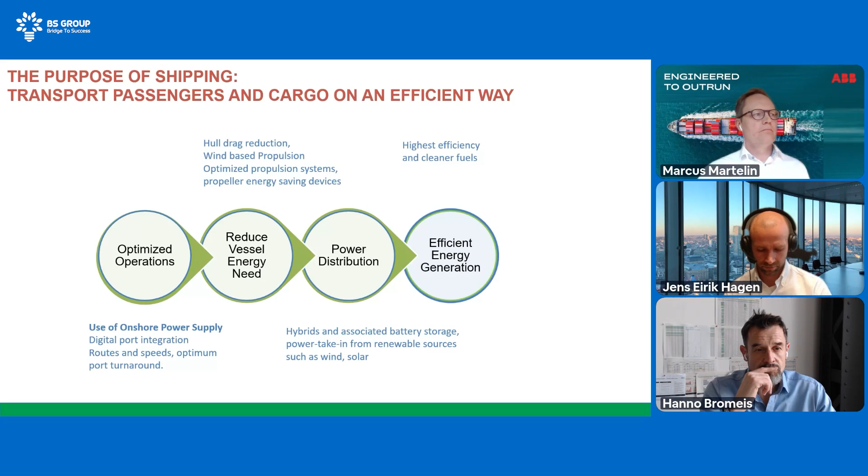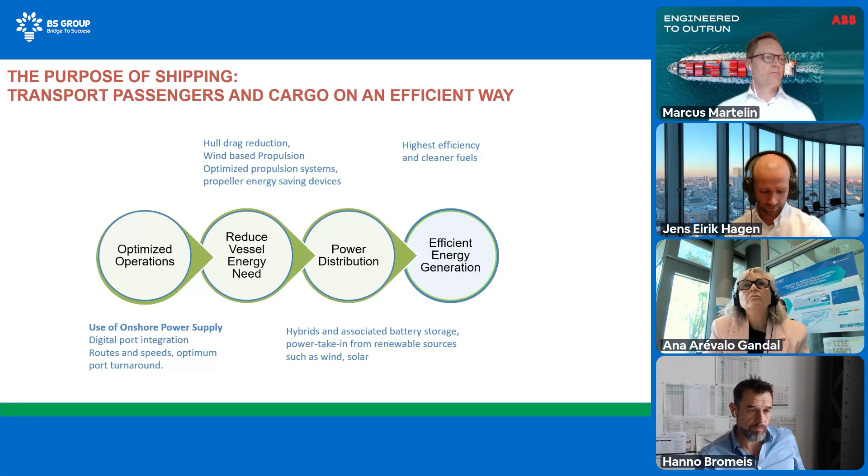And again, personally, since I've been involved for 25 years in energy saving, I see the onshore power supply as part of the overall picture. So you have the shipping industry, and you need to optimize operations, reduce vessel energy need, improve the power distribution of the vessel, and generate the energy efficiently. So there are quite a few actions. And in this frame, one of the actions is the use of onshore power supply. And we see how this is going to help.

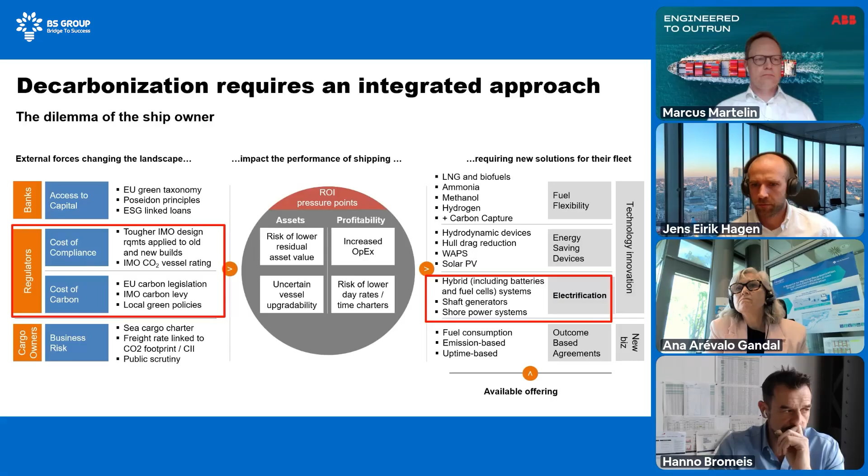Again, I'm trying to present the overall approach. You have the shipping industry at the middle. You have the forces which are impacting it, including the regulations and the way to improve the environment. You have solutions. Among the solutions, let us not forget we have the fuel flexibility. We have the electrification, and in the electrification, there are the shore power systems involved. But it is the overall picture that we cannot forget. Shore power systems are a part of the overall puzzle.

Are there any maritime legislative actions? Yes. Are they covering other countries than Europe? Yes. So there are already requirements in the US, in China, in Norway, and in quite a few other countries, including Singapore, UK, Australia, New Zealand, Canada, South Korea. Some of them are non-mandatory rules, but still the subject is under discussion in a global way. And from our side, we are focusing our attention on Europe, so we have three European ports today.

I'm mentioning the environmental legislation from the EU Fit for 55 package, including the Alternative Fuels Infrastructure Regulation, which covers the supply in ports, FuelEU Maritime and the EU Emission Trading System (ETS), covering primarily the demand, and the Energy Taxation Directive. All of them dictate that by 2030, selected ports in Europe on the Trans-European Transport Network need to be ready for onshore power, covering container ships and passenger vessels, ferries above 5,000 gross tonnage.

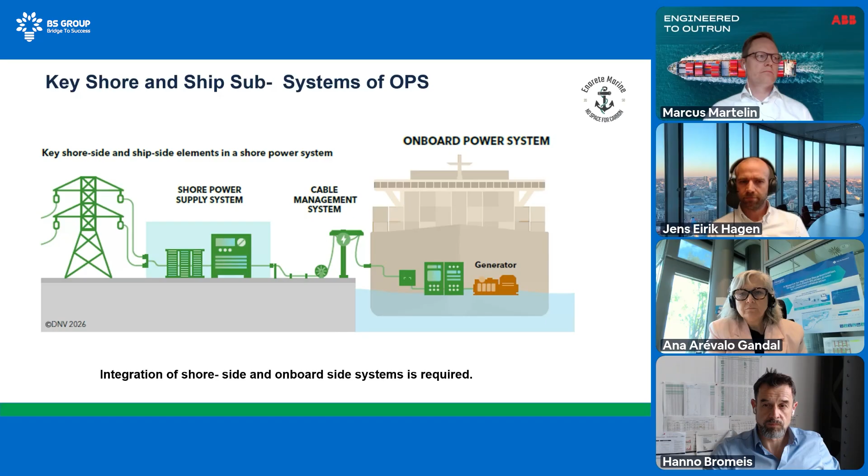And again, I need to say the importance of the integration. There are systems required on the ground at the port. There are systems required on board of the vessel, and these need to be able to work together. And this integration, the engineering efforts to have the correct interfacing, is of paramount importance.

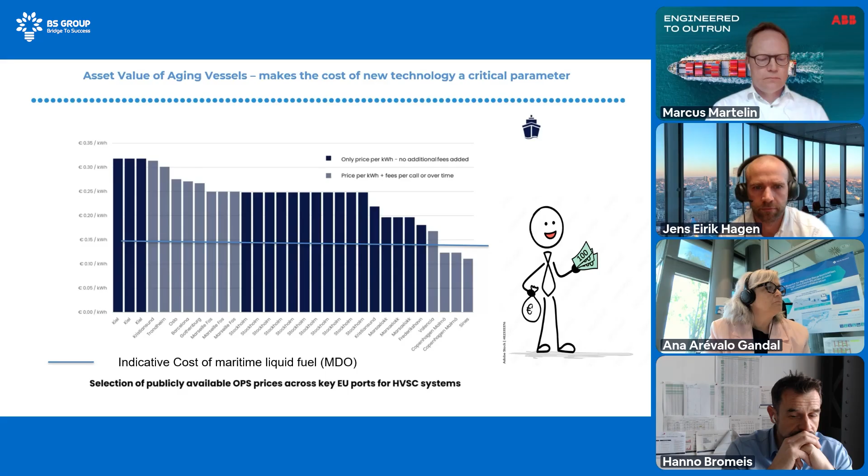So if we see from this point of view, we can say that the electricity is costing money, but there is a but, and this is explained in the following slide, where actually you see that for a period of 15 years, and taking into account the penalties introduced by EU ETS, the penalty costs which are added to the cost of the fuel, at the end the improvement for the ship owner is quite significant. So for the ship owner, it's not only that it is good for the environment, but it's also having the economics working positively.

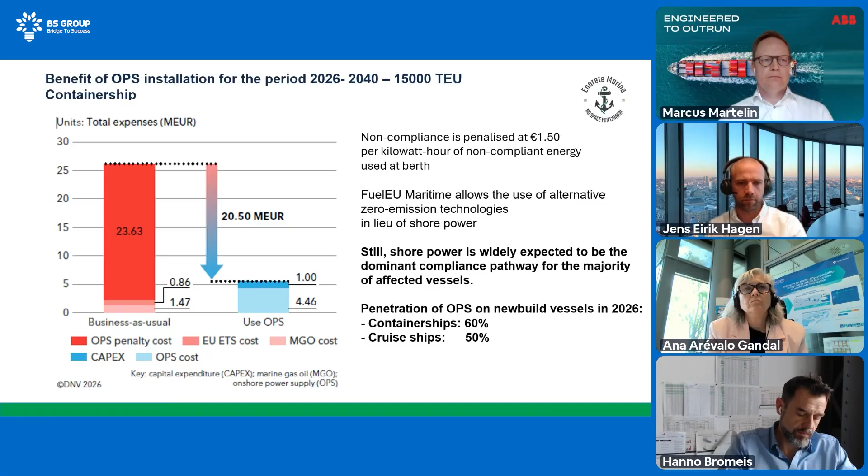It's not a surprise if we see that in 2026, from the new built vessels, 60% of the container ships and 50% of the cruise ships, these are approximate numbers, are already equipped with the systems on board of the vessel to allow shore power connection.

So for the ports it really is a big challenge to provide the power required, which means the regulatory readiness, which is required in parallel to the infrastructure and grid readiness, commercial aspects, the funding readiness. Of course, the harbors, each of them individually, will analyze the demand, types of vessels visiting, power required for individual vessels, and then make the plans for the deployment of the systems on the port and the operational integration.

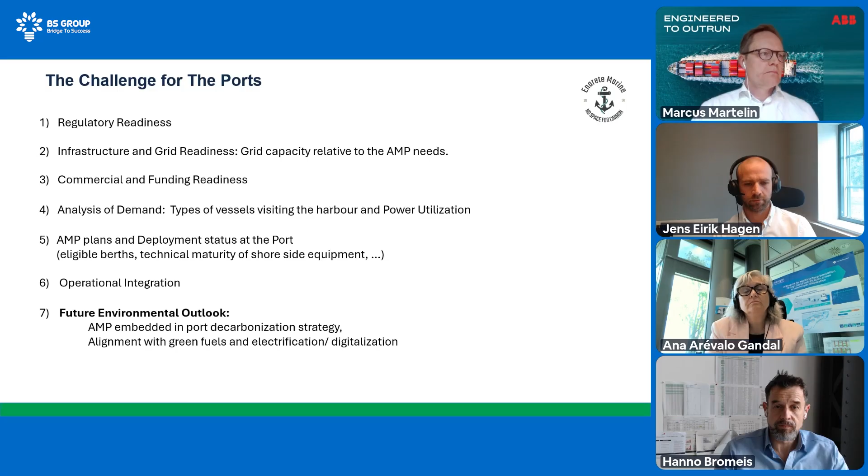Last but not least, the power supply needs to be seen as part of the overall plan, not only for the ports but also for the shipping industry, for decarbonization, and this needs to be also aligned with the introduction of zero carbon or low carbon fuels, and electrification and digitalization are going in parallel. So this is the introduction from my side.

I'm closing the presentation. I see myself on the screen now, and I'm a little bit frightened from what I see.

I will be running the first poll. So I'm asking the colleague who is helping on the polls to put the first poll on the screen, which is covering the question to the audience: what is the primary driver for your organization to consider shore power? Is it the regulatory compliance, the emission reduction targets? Is it originated by the customer or the charterer? Are there any specific port incentives, reduced fees, or is the primary driver a corporate sustainability target? We collect your answers, and we will be able to discuss this at the general discussion at the end of the presentations.

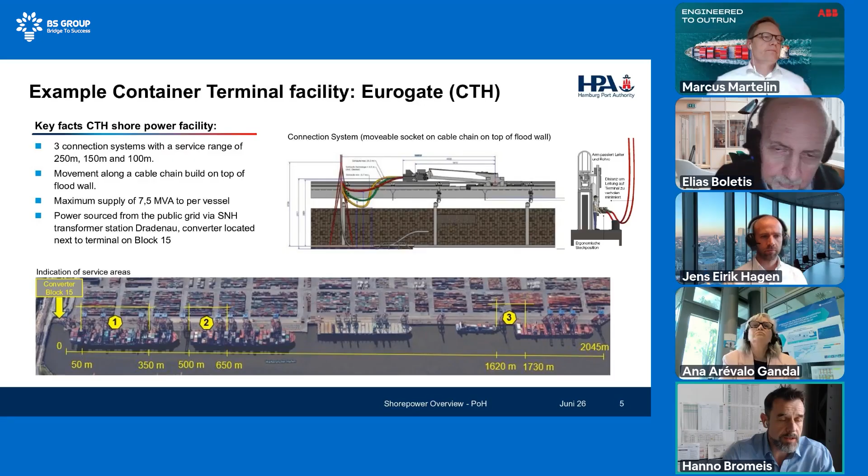And this is basically how you can see it in operation along the quay wall. This is the vessel side on the left-hand side. And the system then goes into position. It can be lowered to the quay wall level. Then the connection can be made and it's raised up again so you can walk underneath freely here. So that's basically our solution to make use of the space that we actually had.

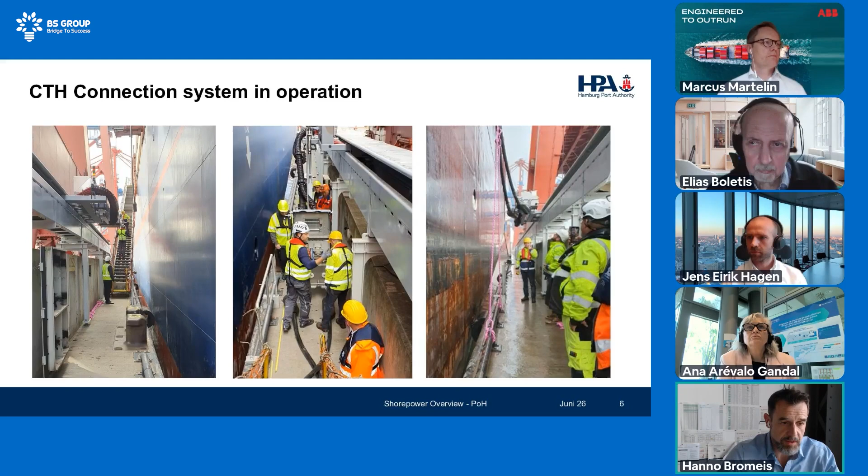At another terminal, we had an even bigger challenge. This is now the Burchardkai, the opposite side of the basin. There, you can see here in the middle, we had the leg of the container bridge on the other side of the flood wall, so there was no option to place it on top of the flood wall. The only solution here was to attach the system to the front of the quay wall.

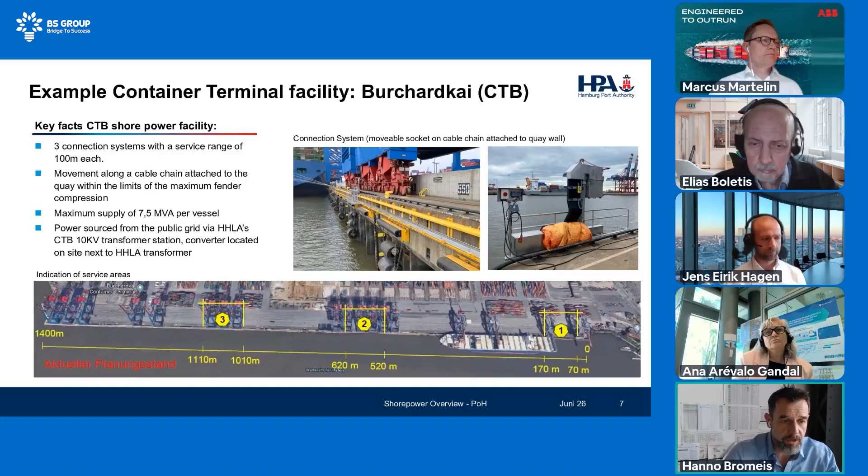So you see these yellow rails here that were attached, and there's a sled, that connection system that moves along those yellow lines. Again, those three service areas were identified for this 7.5 MVA connection we were installing there. And here's a close-up.

You can see this in operation. This connection system goes into position, folds down, so you can make the connection, and then when the connection is secured, it folds back up again, and the container bridge can pass freely underneath. So those are the two basic facility types that we have in the container segment.

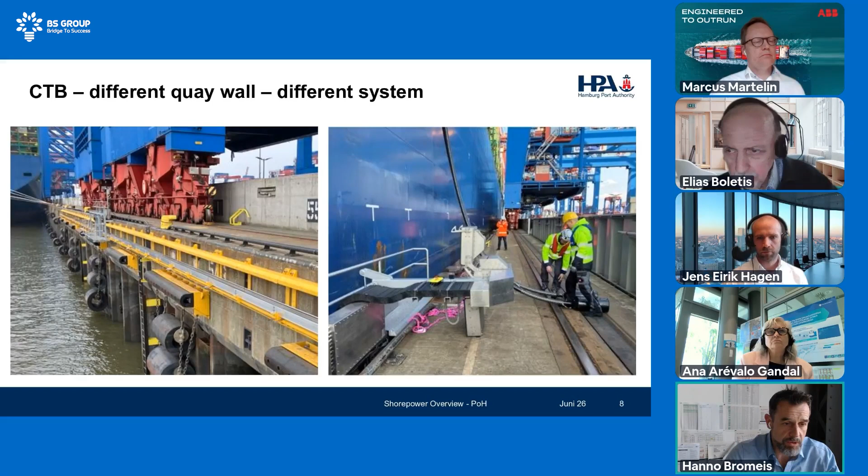All was needed to build during operations, so also a big challenge to get that done. We also have cruise, as mentioned.

That's a classical layout. On the left-hand side, you can see our first facility, the Altona pilot in 2016, which really looks also like a pilot. Ever since then, the industry has evolved, and we're building more like the classical types of vehicles that you can see in the middle and on the right, the classical Steinwerder and Hafen City vehicles that, in our case, are permanently connected to the cable trench and then drive along the quay wall to get into position.

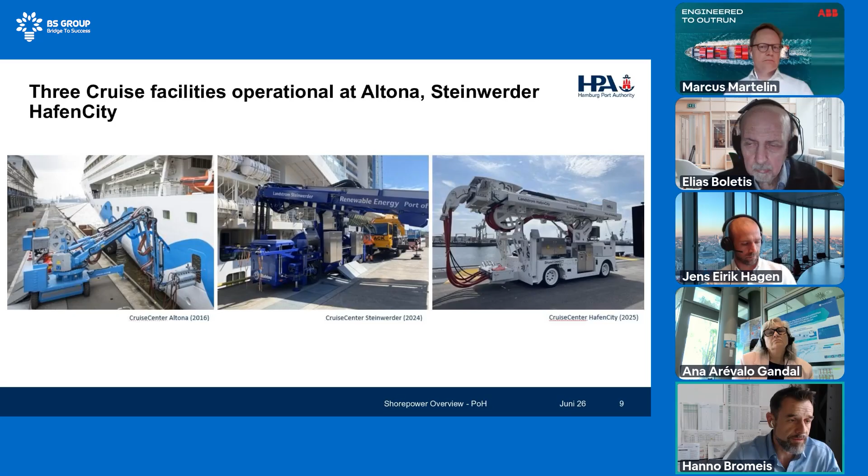So that allows us to have a minimal footprint on the quay wall, because there's no cables lying around on that. That's basically just a quick overview in terms of what we've done, but we are not finished, as mentioned.

If we go back to our little map again, we've got the 3 cruise terminals, so they're all operational, and we don't need to do anything there. In terms of the container terminals, the focus has been to build facilities at the large berth places.

So what's now coming is the short sea connections for the feeder vessels. And we have another RoRo terminal that we are currently planning and starting to build next year, the O'Swaldkai, in that area.

In terms of the short sea, there was for long the discussion about what voltage it should be. We will have only high voltage for the short sea segment also, because we wanted to ensure interoperability across the different ports. So just one single system, high voltage throughout, as the norm is actually prescribing.

The challenge on the short sea is obviously that the length of stay is much shorter, so making the connection needs to be really efficient, because otherwise the whole shore power effort is pretty futile. On average, a short sea vessel stays 12, 13, 14 hours in the port, sometimes across different terminals.

So efficiency is critical. The mooring pattern is much more challenging, because unlike the large vessels which always moor in the same spot, it's not so with the feeder vessels—sometimes they're reversed on the other side. So there again, you need even more flexibility in terms of the connection system, more variability.

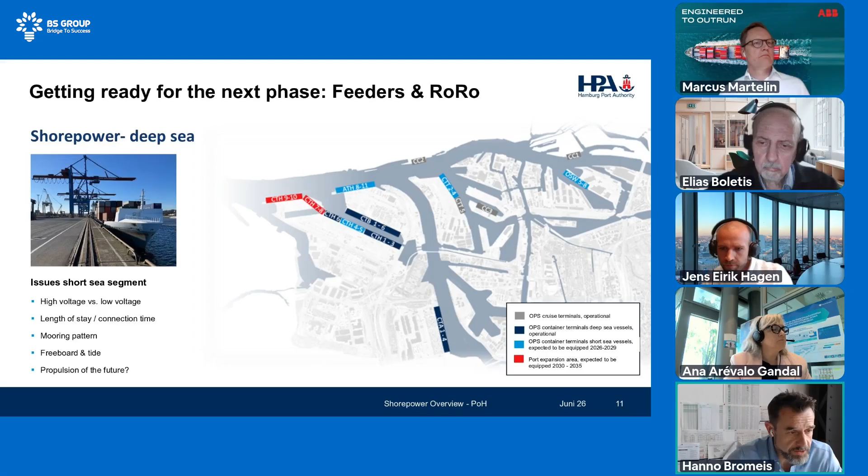So that's a little overview in terms of where we are. I won't really go into the other segment, but by 2030 we try to be compliant, maybe depending a little bit on the funding. We will know towards the middle of the year if we get all our funding closed so that we meet the 2030 target.

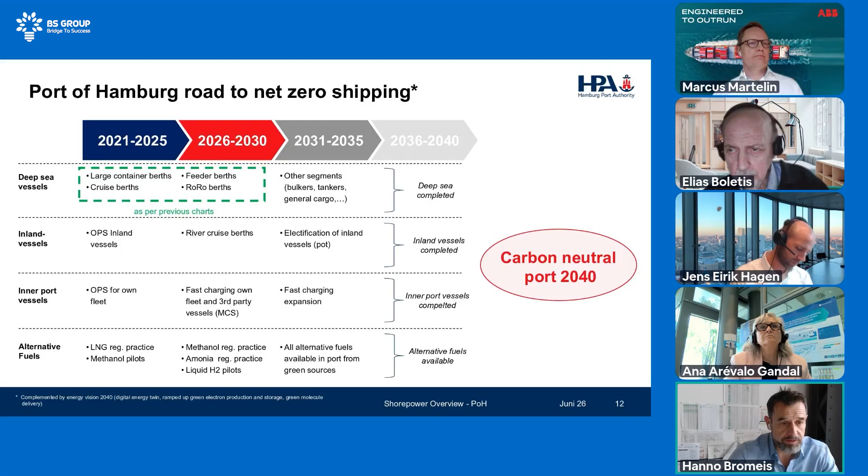Otherwise, basically all the other segments in the port will then follow after. Some issues on the commercial side, because building is one big challenge, operating is the other. How are we doing it here in the Port of Hamburg? We've decided to operate facilities ourselves, so that's the first thing you also need to decide.

Who's actually operating it? Do you delegate that to somebody, or do it yourself? At the moment, we have individual contracts with the shipping companies because it's just individual companies at the moment. But going forward, we will integrate all these contractual aspects into the general port's terms and conditions. It's not the case yet, but come 2030, we're definitely going to do that.

The energy is from the spot market because at the moment we still only have spikes of demand, so you can't really secure that by PPAs or something like that. So that's also something to bear in mind. Where do you get the energy from? It's 100% green, although obviously shore power by definition is green according to the European Union, but we still also buy certificates, so there again we have another different pricing component.

What is the price of the certificates? You need to take that into account.

Obviously, another big issue is the handling, the connection personnel. Where do you get that from, and how can you efficiently deploy that? Especially in the container segment, you will have not a very reliable ETA, ETD plan, so that's a big challenge to have that in an efficient way, with your personnel there ready at the quay wall.

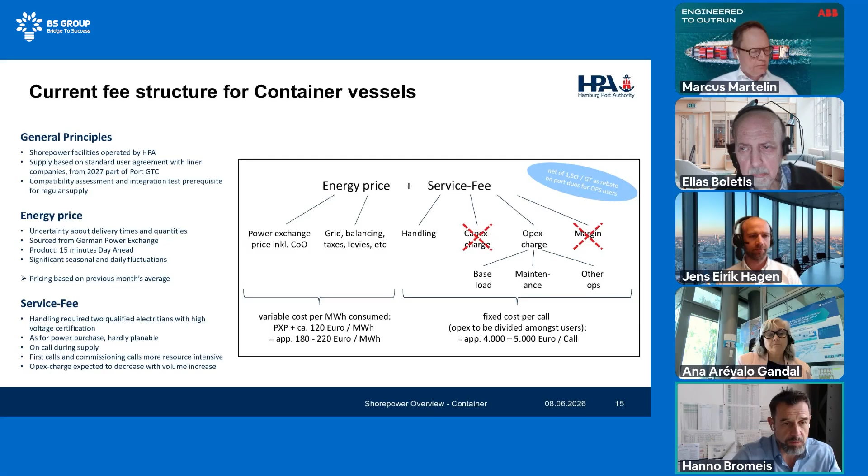So to wrap it all up, we have come quite a way, and after building comes operating, I would say. Building has big challenges, operating even more challenges, and as we need to do this short sea segment, yet more challenges on that level. We very much hope that the regulatory environment stays firm - if it would be watered down, that would be a big setback in terms of the business case.

The classical challenge for everybody is around funding, the grid, and the technology. Funding, we were lucky to have a lot of funding; we will see whether everything will be funded by the middle of the year. Grid - we were quite lucky here in Hamburg because we're an industrial port, so it's a strong port, but still we need to strengthen the grid.

So it's a process step by step, especially if we were to expect more battery powered feeder vessels. We certainly also need more power and more investment into the grid. Technology will be probably a big challenge because if all the ports are building towards 2030, I would expect that the lead times will go up, prices will go up. As mentioned before, the business case right now is very difficult because it's very expensive, only few connections. So after 2030 it will be much more feasible to cover your cost.

Involving the terminal is a big challenge to watch out for. In our case, we were doing it ourselves, so terminals hadn't really had a stake in there. That's a bit of an issue, how to involve them, because you actually clearly are in conflict with their operations. The efficiency of the operations, the learning curve, how to deal with your people, how to staff them properly, digitalization is a big challenge that you obviously need to watch out for.

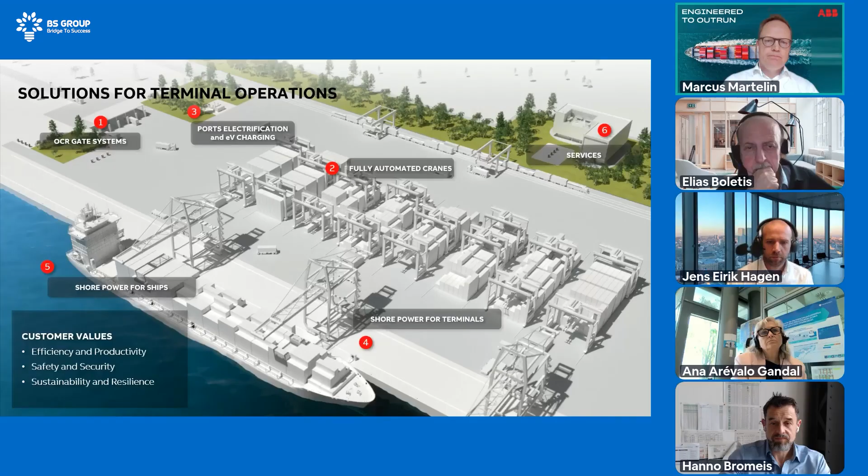There have already been two presentations, so there could be a little bit of repetition, but looking at shore power and the maturity level of the technology, it almost looks like a no-brainer that this is a very good way to cut emissions, both global and local, while the vessel is berthed. At least as we see it, there is still public funding available, and the regulatory framework in Europe is quite solid and makes shore power a commercially viable solution.

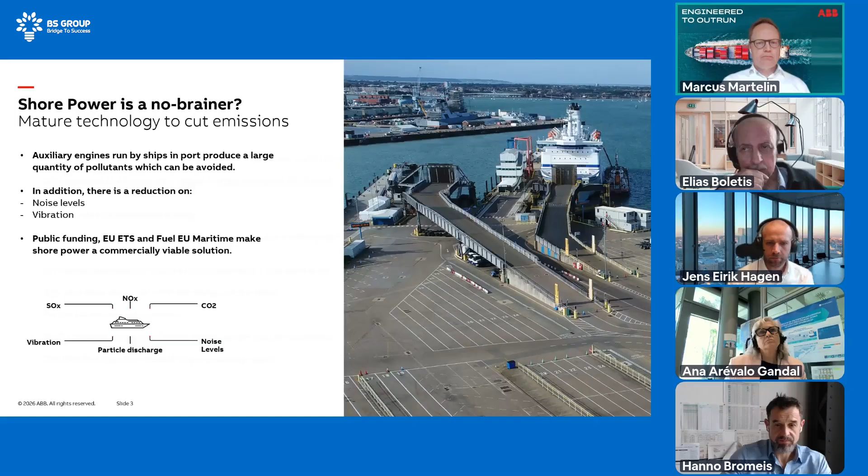But then there's also the flip side of things, and I suppose these are very much the topics that we are discussing today. There is a high capex cost which comes from the civil works, the electrical substations, cabling and cable management systems on the shore side. And grid capacity, as we see it, is always a question mark when a new project is being started, and I would urge any terminal thinking of this to start really with the grid capacity, because we are competing with many initiatives which demand electricity in the cities. And once we go for shore power, there's a wish to go for renewable energy, as we are really trying to cut the absolute emissions produced.

There are so many stakeholders in this whole equation. You have the DSO, the Port Authority, the terminal operators, the ship owners, ship operators, and trying to make a business case for every stakeholder is a challenge and takes time. And in order to have a business case, you need to utilize your assets. They have to be fully utilized, and that means that both the ship and the port need to be ready. It doesn't help if only one of them is ready.

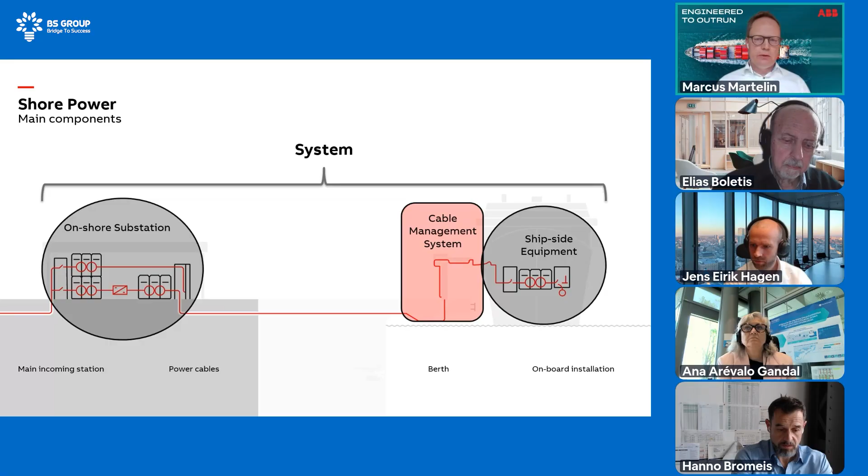And then the vessel side installations do depend on the vessel type. Do we need a transformer to match it with the main switchboard of the ship, or can we connect directly? And the critical piece of this energy chain is really the cable management system, which also has to adapt to the various needs of the vessel types and the available space on the terminal side and so forth. So this is an extremely critical piece of this system. And just for the sake of clarity, ABB does not manufacture cable management systems, but we do deal with all the major suppliers and integrate them into our deliveries.

And now this IEC standard has been mentioned many times. It's actually a triple standard, so it's also an IEC, ISO, and IEEE standard, and covers most of the ship types like container, ro-ro, Ro-Pax, and cruise vessels, and you see the differences on the vessel side, and also the power levels and the connecting voltages are defined there.

The fourth category, which I wanted to lift here, are the hybrid or zero emission battery driven vessels, which are really the wild west of the connections, because there is no strong standard yet in place. And also we do have vessel types which are not covered by the standard yet, like the tankers, which most likely will grow as a segment, because California is starting with the CARB regulation also for tankers. So we expect that segment to grow, and the answer to that is that there will be an IEC annex coming for tankers as well.

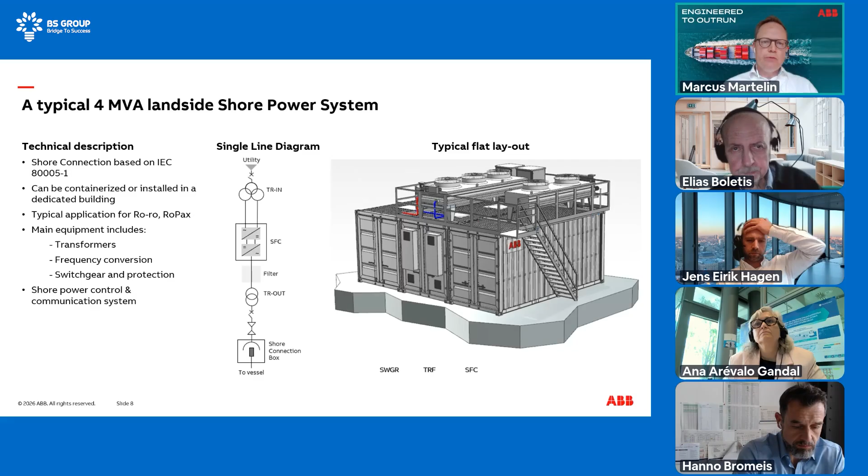So with these 4 MVA units, you are able to cover the majority of the vessel types, and like Hanno was saying, there has to be this optimal use of the equipment on the shore side. So sometimes in one connection point you need 4 MVA, and sometimes you need 8 MVA. And the power levels are really described in the standard, which is mentioned on the slide.

There's a lot of talk about batteries, not only in ports, but basically in everything nowadays. There's a lot of talk about it also in terminals or ports, and I would say that within the last 12 months, the number of inquiries we see for battery energy storage on shore has really grown.

So there's definitely interest in it, and it's no wonder when looking at what kind of features can be provided. Customers look for combining solar systems and wind, and with batteries you can really make the best out of the renewable energy. You can also increase the reliability of the whole port electrical infrastructure for short blackouts, and then in the future, most likely we start to see participation in the energy markets as well, which would mean that you fully utilize the installation also outside of the shore power as such.

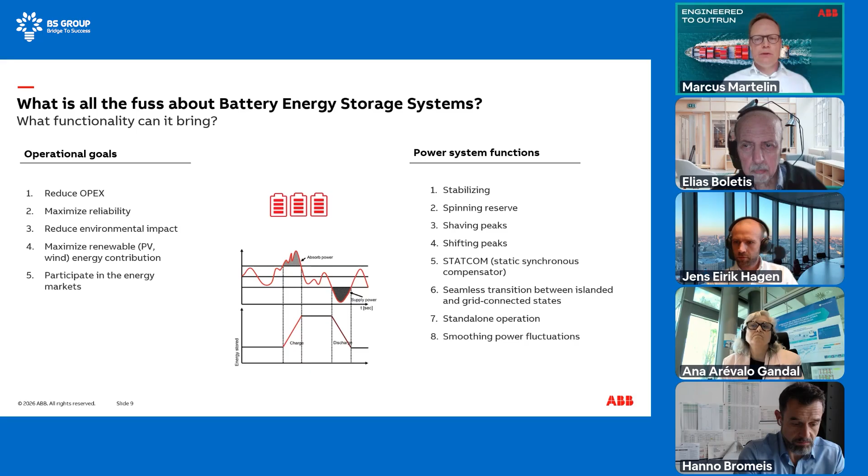And this is not really just a future thing. It's something that already happens, and we have delivered the Port of Toulon shore power system, which consists of four connection points, 3 for ferries and 1 for cruise connection, providing both 11 and 6.6 kilovolts and both frequencies, and has a decent size of energy storage system as well, which is there to do the peak shaving from the grid side, and also make the best use of the photovoltaic energy that is being produced.

This system is in operation, and I would say that the only next thing that can be developed here is the full system optimization. So considering which vessel is the next one coming in, what is the estimated load of that one, is the sun shining tomorrow, so should I charge today or tomorrow? This type of total optimization is very difficult by hand, so it should be done by optimization software, and I think things start to move in that direction in the future.

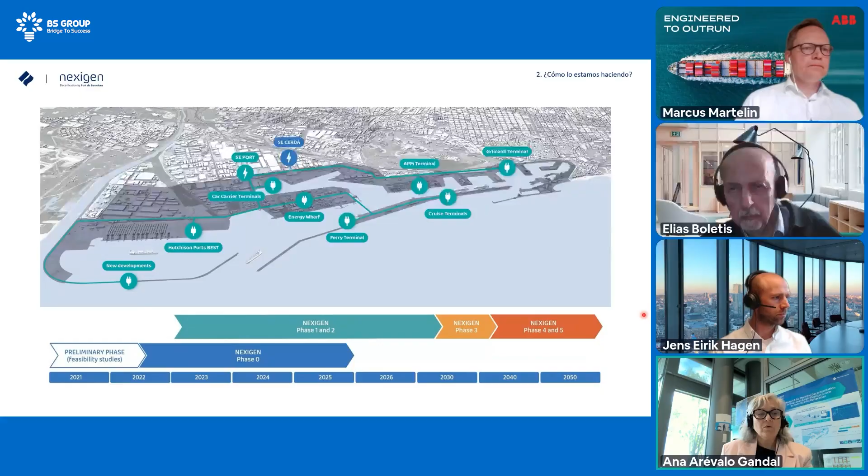But how are we going to do this? Sorry. Well.

Let me focus on our BEST container vessel OPS. This is our first OPS, located very close to the shore side. This was a key milestone because it represents the first OPS for container vessels in the Mediterranean. And also, as Hanno and Marcus have explained, it is a 7.5 MVA OPS according to IEC, but we can also split it in two, so we can operate 2 vessels simultaneously with the same OPS.

So far, in just 18 months, we have completed more than 75 stopovers connected, delivering more than 6 million kilowatt hours. As Hanno said before, the vessels we have connected are around 25,000 TEUs, and they demand in Barcelona around 2 megawatts on average. They stay a long time in Barcelona, so we have covered more than 3,000 hours of connection. What is more important, we have saved more than 4,200 tons of CO2. For me, this is what is most important.

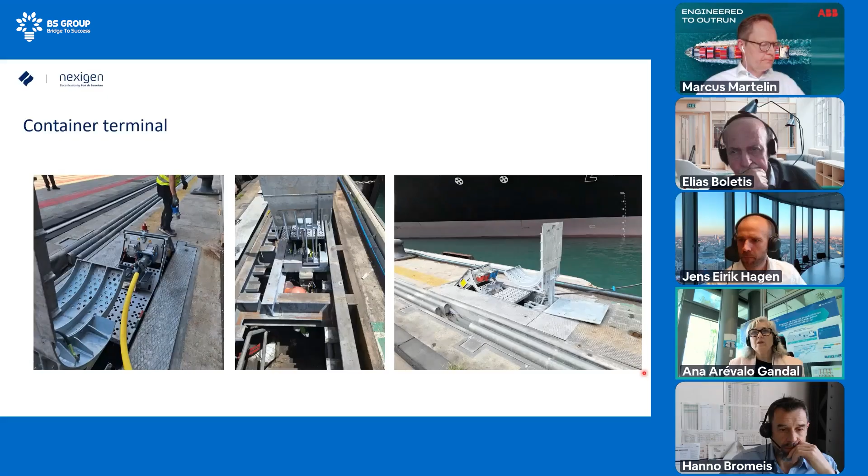This is the junction boxes that we have on the quay. And now, if we move from containers to ferries, we see a different operational reality. At the Grimaldi ferry terminal, we have already reached more than 230 stopovers connected to OPS.

This is because the vessel is the same vessel that comes to the port every day and stays in the port around 4 hours. And this resulted in more than 2 million kilowatt hours of energy delivered. And as you can see, around 500 tons of CO2 avoided.

In this case, the average power demand is lower, much lower. It's around 766 kilowatts. And it also gives us a clearer and more realistic picture of the actual consumption patterns, which is, I think, particularly relevant for the future designs that we are doing now.

Compared to container vessels, OPS for ferries is closer to becoming a routine operation, which makes it an excellent environment to consolidate procedures, improve efficiency, and so on. Also, digital improvement, etc.

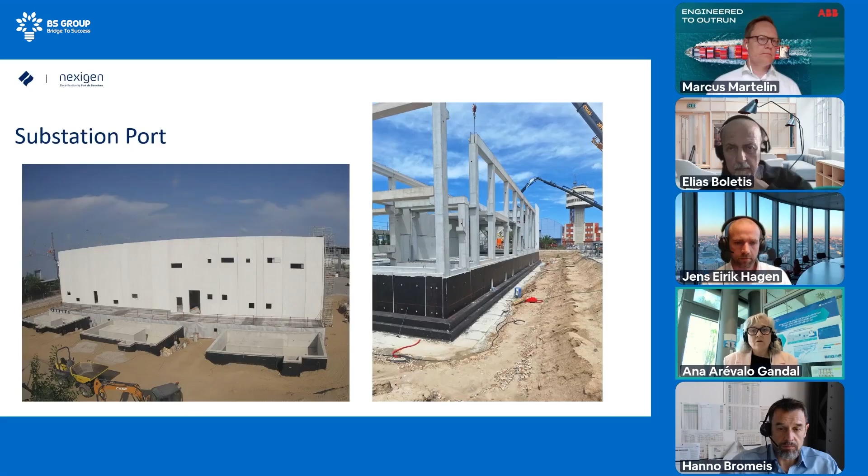These two cruise OPS systems will be the first to be connected with the substation that we are building, and will be ready for 2027. So let me move on now.

Briefly, to touch on the investment behind this Nexigen plan. In big numbers, the total investment is estimated at around 200 million to develop the whole project. Out of this, around 64 million are already allocated to ongoing works which are either executed or under execution.

And it's also important to mention that around 30% of these ongoing works are subsidized through European funding programs, which I think is very important for developing this infrastructure with a high capex. So the financial support is key to accelerating the implementation of this kind of project.

Let me finish with some key lessons learned from operation, which are very relevant. One of the most interesting findings is that the current energy consumption is lower than expected. And this has a lot of implications for infrastructure sizing, for business models, for planning assumptions. But I think it is also a good opportunity because it allows us to optimize future design.

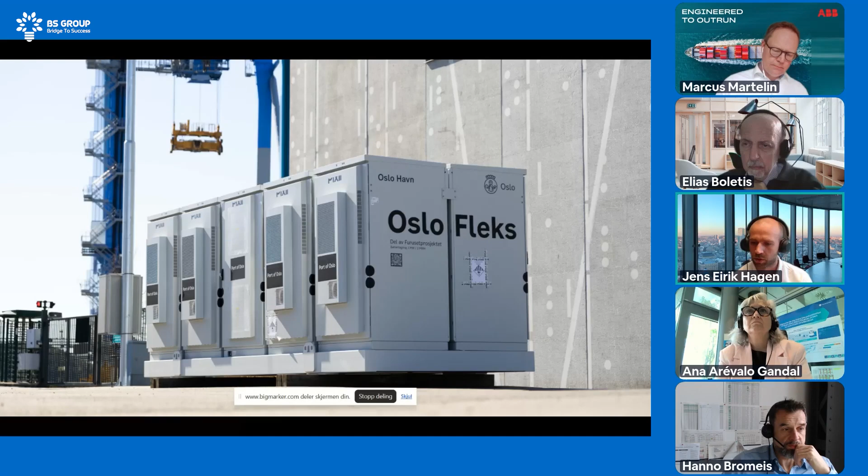This is what we're currently testing in Oslo. We have just received two big battery packs of 2 MWh that will be placed in different places, not to compensate the shore power, but to compensate all the other peak loads, which can enable more grid capacity.

So now I'm on my last slide. Let me just conclude with the 5 lessons. We have been building projects and have learned along the way, and we have seen that starting with clear targets and good data has been really important.

We have built before demand is fully there. It's getting more and more obvious that the future is electric, and demand is just a matter of time. Looking at fair business models and strong incentives is also an important aspect when we build projects.

Utilization is really important, and looking at all the projects as one big energy system helps us use the capacity better. So I think the last takeaway is that we have built a lot of infrastructure, and it's not about how much infrastructure you build, but how much it's being used. That is where we can actually reduce emissions, and that is our big focus area now: optimization of the port energy system.